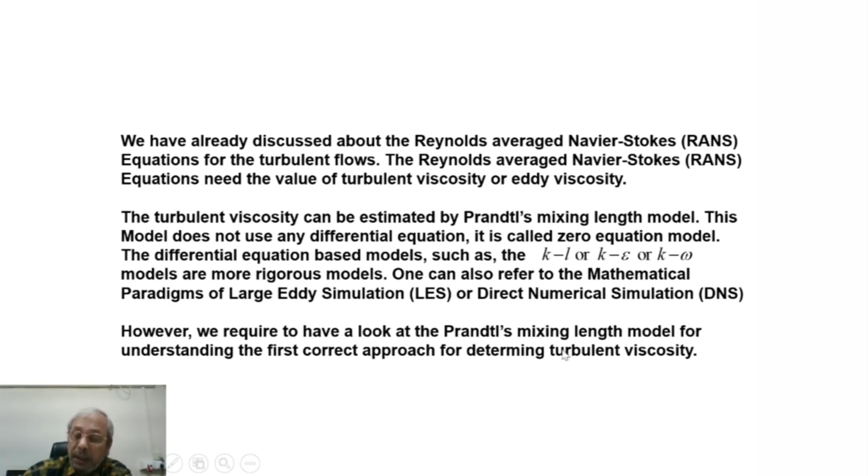However, we need to look at Prandtl's mixing length model to understand the first correct approach for determining turbulent viscosity. Now, in the case of turbulent flow, velocity, pressure and temperature at a fixed point in space do not remain constant with time, but perform very irregular fluctuations of high frequency.

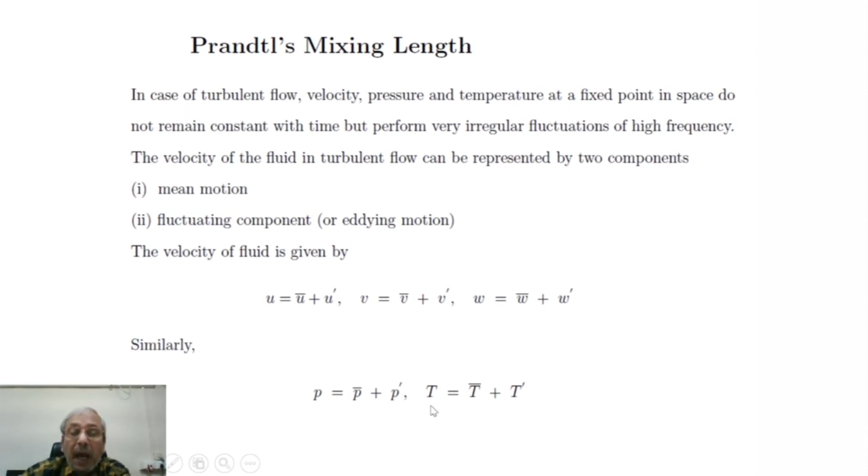The velocity of the fluid in turbulent flow can be represented by two components, mean motion and fluctuating component. We have already seen this. The velocity of fluid is given by u equal to u bar plus u prime, v equal to v bar plus v prime. This is the fluctuating component. w equal to w bar plus w prime. Similarly, p equal to p bar plus p prime, and temperature equal to T bar plus T prime.

However, the fluctuating components do not bring about the bulk displacement of a fluid element. The instantaneous displacement is u prime dt, and if that is indeed not responsible for the bulk motion, we can conclude that between the interval of minus T and plus T, the integral of u prime dt equals 0, where T tends to infinity.

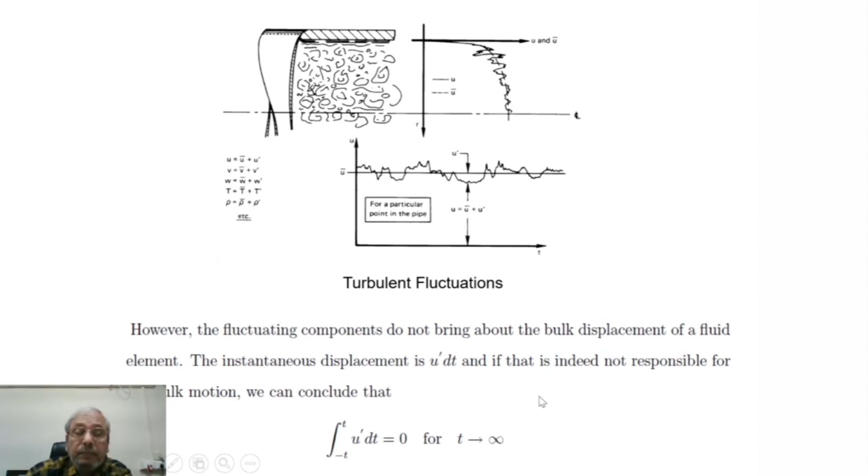Due to the interaction of fluctuating components, macroscopic momentum transport takes place. Therefore, the interaction effect between two fluctuating components over a long period is non-zero, and if we perform this integral in the time domain, u prime v prime dt, this is non-zero. So the u prime dt integral is 0, but u prime v prime dt is non-zero.

We take the time average of these two integrals and write u prime bar equal to 1 by 2T times this integral, which is equal to 0 when u prime is being integrated. But u prime v prime bar equal to 1 by 2T times the integral of u prime v prime dt, and this is non-zero. So u prime v prime over bar is non-zero. Similarly, v prime bar, w prime bar, p prime bar and T prime bar are 0.

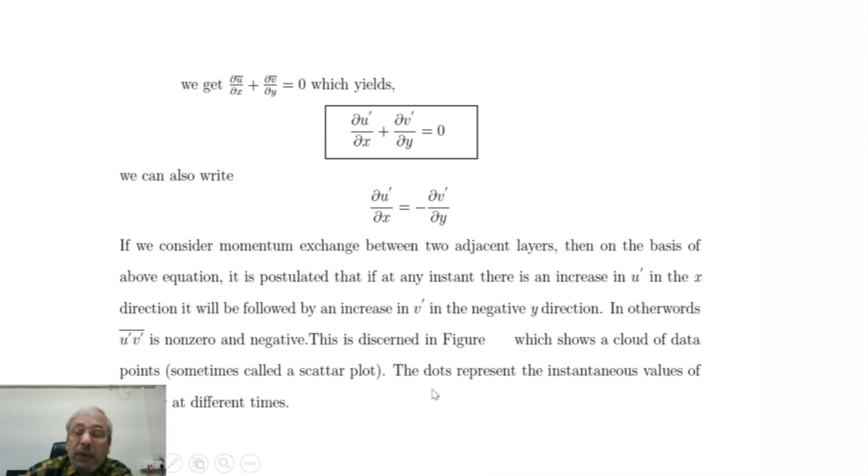For unit area of the plane PP, the instantaneous turbulent mass transport rate across the line, because of fluctuation, if there is any mass transport across this PP line, has to be rho into v prime. Associated with this mass transport is a change in the x component of velocity, u prime.

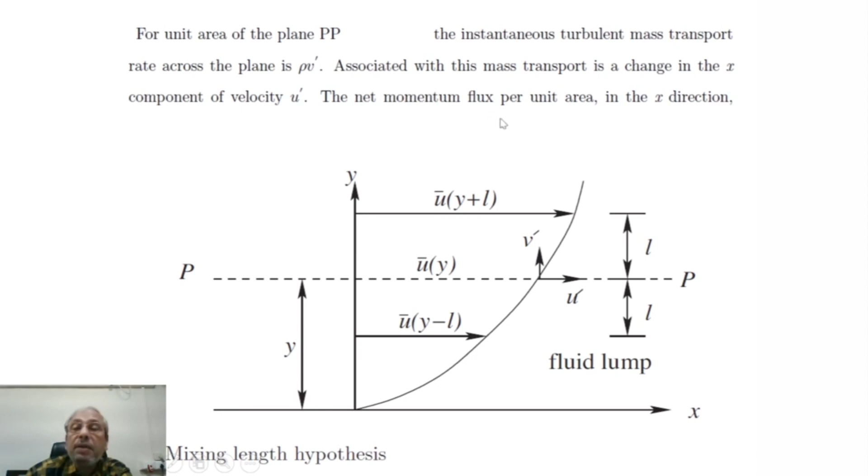So whenever there will be any fluctuating component in the y direction, which is v prime, it will be accompanied by a fluctuation in the x component, that means u, and if v prime is in the positive direction, then u prime will be in the negative direction. Why? The net momentum flux per unit area in the x direction represents the turbulent shear stress at the plane PP, which is rho u prime into v prime.

When a turbulent lump movement is in the upward direction, that means v prime is the fluctuation, and if it is in the upward direction, we can write v prime greater than 0. It enters, immediately at the next layer, a region of higher u bar, because this is the variation of u bar, the mean velocity profile.

So it enters a region of higher u bar and therefore is likely to effect a slowing down fluctuation in u prime. So whatever is the value of u bar here, at the slightly upper level, u bar is more. So when this v fluctuation is reaching there, it will have a tendency to share the momentum with the next layer, and the upper layer, which has a greater mean velocity, will be slowed down. So this will effect a slowing down fluctuation in u prime, that is, u prime is negative.

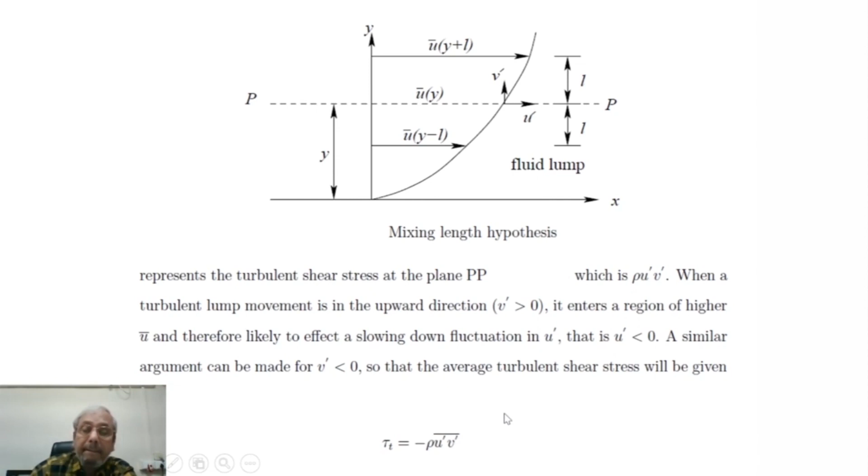Again, let us imagine a turbulent fluid lump which is located a distance L above or below the plane PP. These lumps of fluid move back and forth across the plane and give rise to the eddy or turbulent shear stress effect. At y plus L, this L is very small, the velocity would be u bar (y plus L). If we expand in Taylor series, this will be u bar (y) plus L del u bar del y.

While at y minus L, we can write u bar (y minus L) equal to u bar (y) minus L del u bar del y. And again, let us recall that L is very small, so that we can expand these expressions in Taylor series.

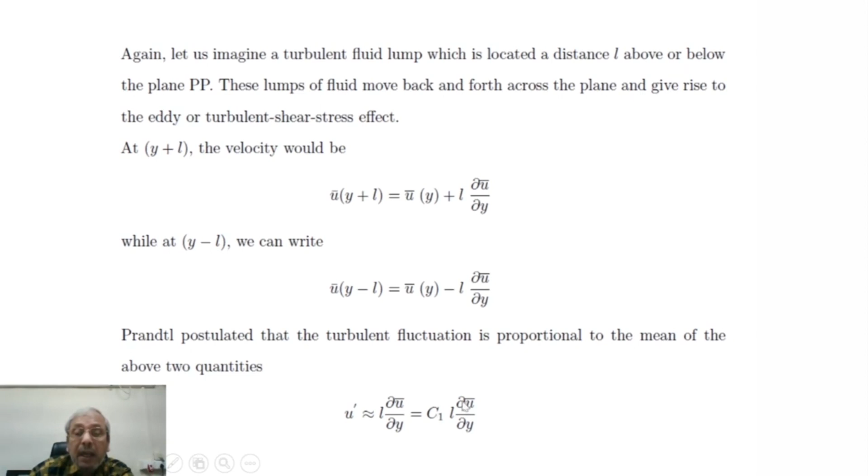Prandtl postulated that the turbulent fluctuation is proportional to the mean of the above two quantities. So if we try to get turbulent fluctuation from these two expressions, according to Prandtl, u prime is proportional to L into del u bar del y, or this proportionality is converted into constant equality. We introduce a constant: u prime equal to C1, an arbitrary constant, L del u bar del y. Here L is the Prandtl's mixing length.

This is analogous to mean free path, that is the average distance a particle travels between two collisions according to kinetic theory. Now, in molecular transport problems, the way we define the average distance a particle travels between two collisions, that is mean free path, Prandtl's mixing length in case of turbulence mixing is analogous to mean free path for molecular transport problems.

Prandtl also postulated that v prime is of the same order of magnitude as u prime, so that v prime can also be written as another constant C2 L del u bar del y. Now the turbulent shear stress is given by minus rho u prime v prime over bar. So we can write rho L square (del u bar del y) whole square from the expression of u prime that we got and from the expression of v prime. And we can clearly see C1 and C2 can be included in the unknown mixing length.

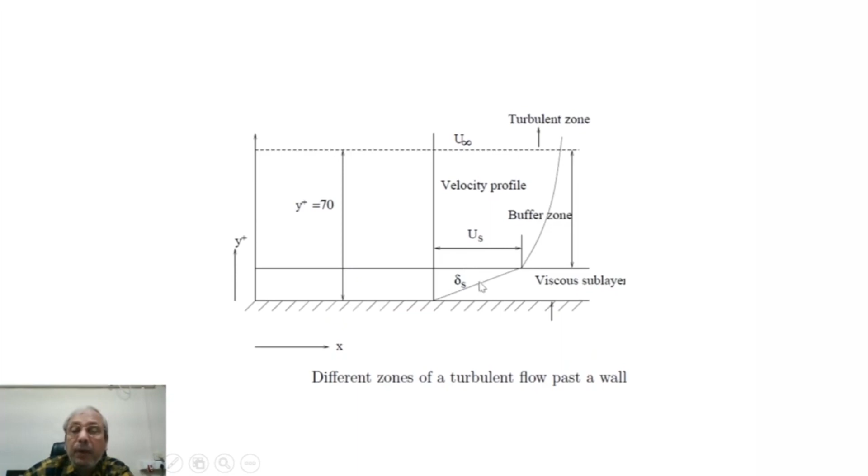A very thin layer next to the wall behaves like a near wall region of laminar flow. That's this region I'm calling the viscous sublayer region. The layer is known as laminar sublayer, and its velocities are such that the viscous forces dominate over the inertia force. Again, in this figure, no turbulence exists in the sublayer.

As it has been stated, in the near wall region inertia effects are insignificant, and we can write then nu del 2 u bar del y2 minus del y of u prime v prime over bar. So inertia terms are not there on the left hand side. Flow over a flat plate, pressure gradient is 0, and the viscous term together with turbulent shear stress term are the stress components on the right hand side.

So we can write nu del 2 u bar del y2 minus del u prime v prime over bar del y equal to 0, which can be straightforwardly integrated as nu del u bar del y minus u prime v prime equal to constant. Just integrate with respect to y. Again, we know that the fluctuating components vanish near the wall. So, very close to the wall in the sublayer region, they do not exist.

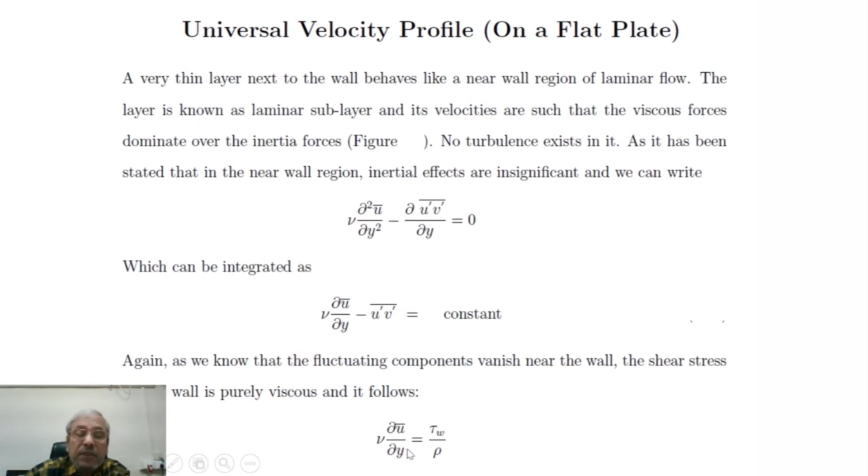We are transferring nu to the right hand side, and over a very small distance from the wall, we are writing this as u bar minus 0 divided by y minus 0 from the wall equals tau w divided by rho into nu. And tau w by rho can be substituted by u tau square.

So tau w by rho we are substituting by u tau square, and we are writing this as u tau square by nu, where u tau is given by root over tau w by rho, and this u tau is known as friction velocity. This is friction velocity.

So from the aforesaid expression, we can rearrange and write y u tau by nu equal to u bar by u tau. And this gives us a non-dimensional coordinate which is called y plus. It is defined as y plus is equal to y u tau by nu. It's a non-dimensional distance given by y plus.

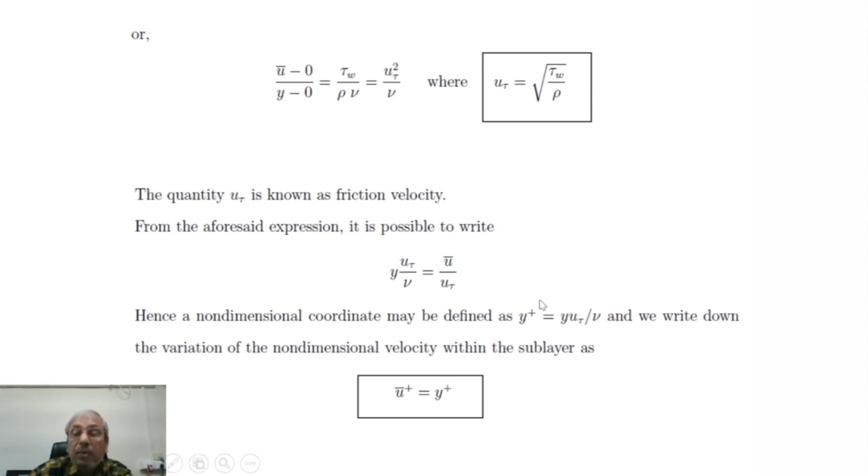Now, that's what I said. So velocity variation in the sublayer is linear, where u bar plus equal to y plus, and this is y plus scale. I have already mentioned this is very small, but here we have magnified it a little to understand this linear profile.

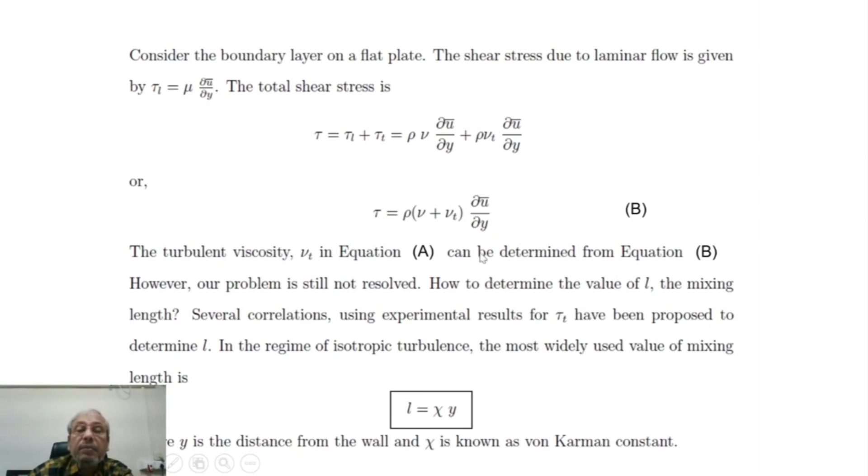In the turbulent zone, the turbulent shear stress from the Prandtl mixing length model, we have already seen, if this is L, shear stress is given by nu T, and nu T is given by L square del U del Y. So now we can write tau T is equal to rho L square del U bar del Y into del U bar del Y. So we can write tau T equal to rho L square del U bar del Y square.

Where L is the mixing length given by chi into Y, and chi is the von Karman constant. With L equal to chi Y, we can write tau T by rho as chi square Y square, where Y is the distance from the wall, into del U bar del Y squared.

So tau T, turbulent shear stress in the turbulent region. We are now not in the viscous sublayer region. We are considering the dynamics in the fully developed turbulent flow. So there tau T by rho is chi square into Y square into del U bar del Y squared.

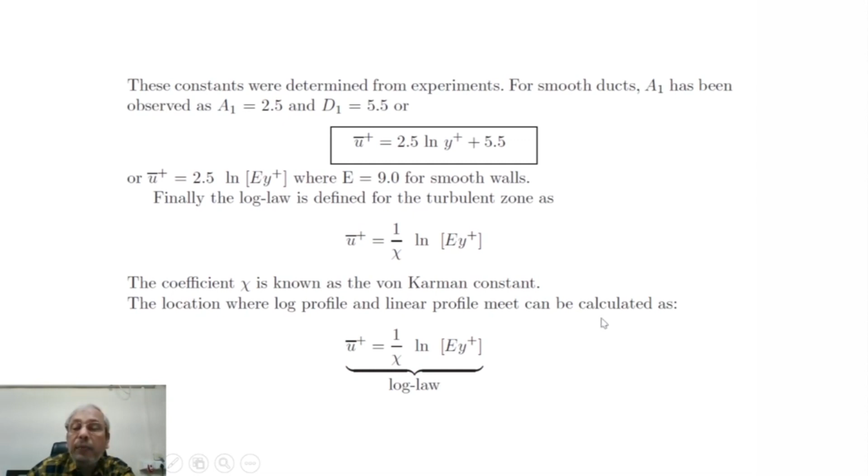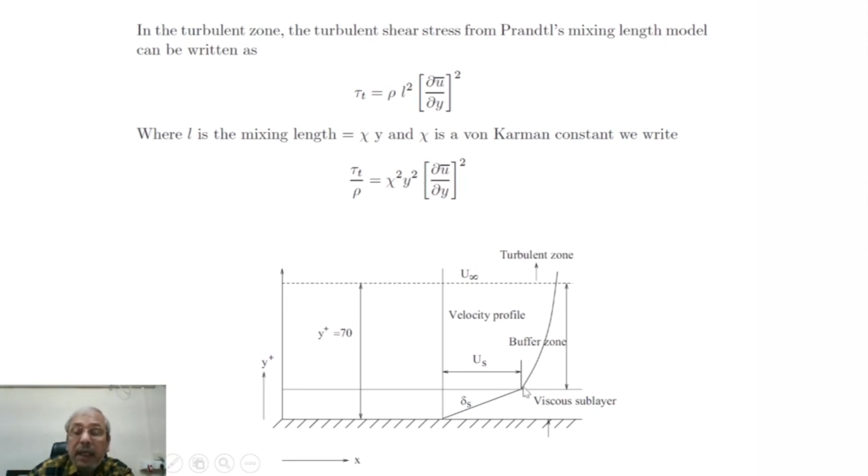Finally, the log law is defined for the turbulent zone as U bar plus equal to 1 by chi ln E y plus. The constant chi is known as the von Karman constant. The location where the log law profile and linear profile meet can be calculated. So it is really of interest to find out this location, this distance in y plus, where the log law profile, which is the profile for the fully turbulent zone, and the linear profile, which is the profile for the viscous sublayer, merge or meet.

The log law profile is U bar plus equal to 1 by chi ln E y plus, and the equation for the linear profile is U bar plus equal to y plus. So if this U bar plus is substituted by y plus and we solve for y plus, we'll get the location of y plus where the linear profile and the log law profile meet.

It is given by 11.63 y plus units. In order to estimate how small it is, in terms of y plus, the boundary layer thickness is around 1500 units. So we can imagine how small this y plus is. If we want to compute, the grids near the wall have to be very, very fine to take care of this y plus equal to 11.63 or 12, roughly that distance.